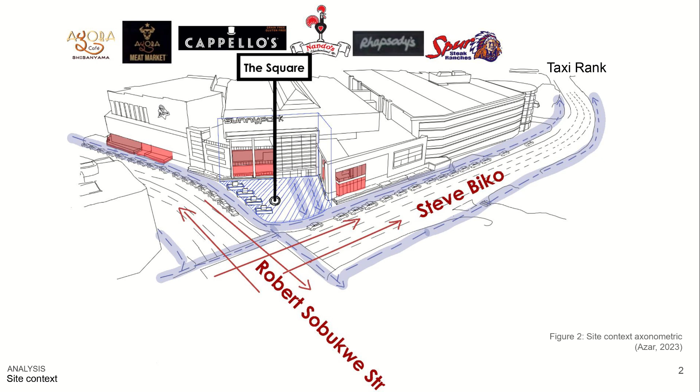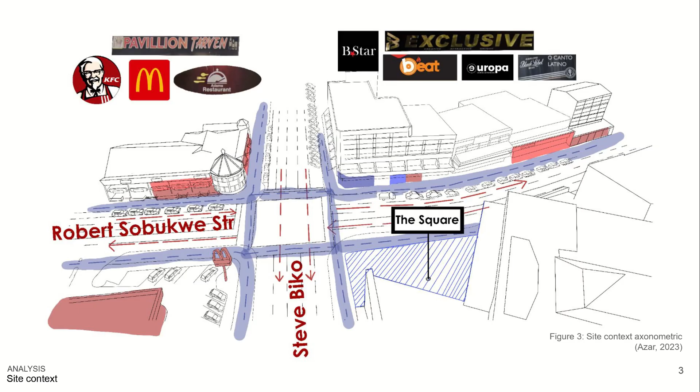Restaurants and bars associated with the mall overlook the square and the south surrounds of the mall. This includes the Spur, Nando's, and Ayoba Shisanyama. On the opposite side of Robert Sobukwe and Steve Biko are high-end fashion stores, chain food stores, and clubs, to list a few. The quality of infrastructure is ensured by the mall and therefore holds itself to a high regard.

The square of the mall currently provides a limited shaded seating area which can be classified as a weakness. There is an opportunity for the square space to facilitate events and to host a space for refuge.

The infrastructure of the mall is well maintained and kept clean. We observe that there is not sufficient lighting at night, which can be classified as an opportunity. The square of the mall facilitates a high number of foot traffic and people sitting.

Another weakness is the infrastructure of the mall that comes across as very rigid and is surrounded by a harsh environment. We feel this intersection has lots of potential, so here follows a few opportunities we identified.

The square can host food markets and culture events. The basement dedicated for services can be better utilized. We would like the intersection to attract a variety of economic groups, to facilitate more seating and to provide services for the traders to make use from, as well as to soften the hard landscape.

There is an opportunity to create a circular economy as well as the opportunity for advertising and sales. We would like the square to act as a linkage between the mall and Robert Sobukwe Street.

The following threats were identified at our intersection: too formal, which results in being alienated from the rest of the street, vehicular traffic along the mall, and the body corporate of the mall.

Through the SWOT analysis, we concluded that we would like to focus on the following aspects that were observed to be the stepping stones for our intervention: to have sufficient lighting during night, creating opportunities for future circular economy through providing basic services for the traders to make use of, and to increase the amount of trees and vegetation on site to soften the hard landscape.

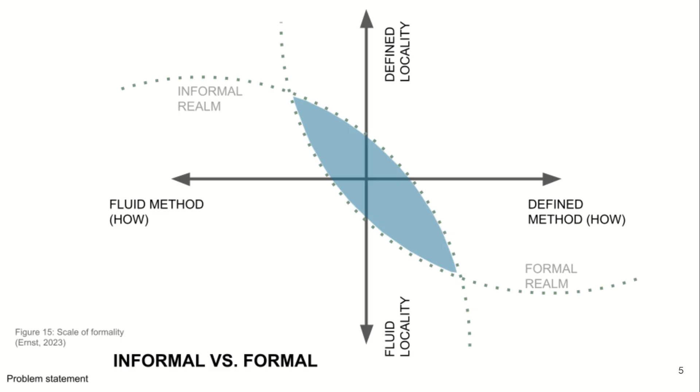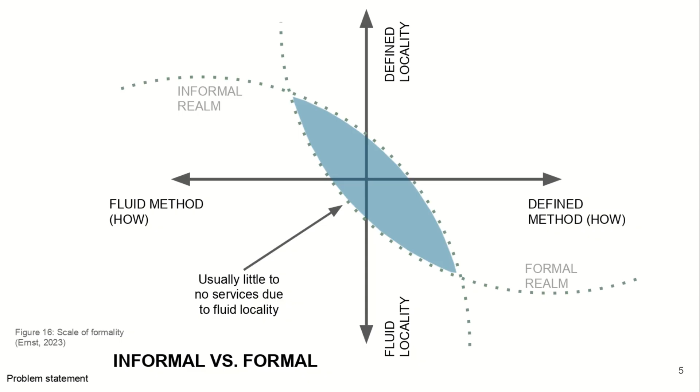Further, it is evident that a prevalent setback in the informal users of Robert Sobukwe Street is the lack of public access to services that could be made freely available by the mall. We do, however, feel that if given the chance, the two realms could be effectively intertwined at this point. In order for a significant value proposition to be made, the stark divide between the two realms needs to be addressed.

To make informed decisions on how we address this problem, we conducted a series of site observations. The observations took place over the length of approximately a month, and any assumptions made in the study are grounded in further desktop research on the relevant topics.

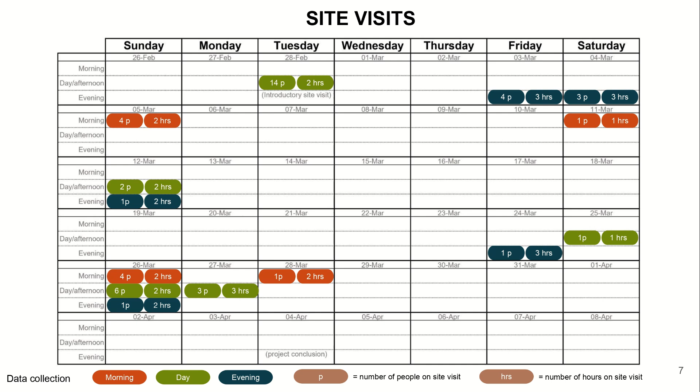At first, we assumed that the mall prevents all vendors from selling on the square, though mobile vendors do occasionally market themselves. This rule is enforced by the security along the mall's edge and on the square, who also ensure a safe environment for passersby. The parking lot is filled on the first few levels, but rarely fills to the top.

Building on the data we have collected, our intervention and value proposition is also informed by the successes and failures of two precedent studies. This concise analysis of precedent studies shows how previous projects, both international and local, strengthen the ability that malls and event spaces have on binding a community.

Our first precedent is the High Line, located in New York City. The High Line used to be an old railway located above a portion of New York and was repurposed to accommodate social interactions, active movements through the park, and community events.

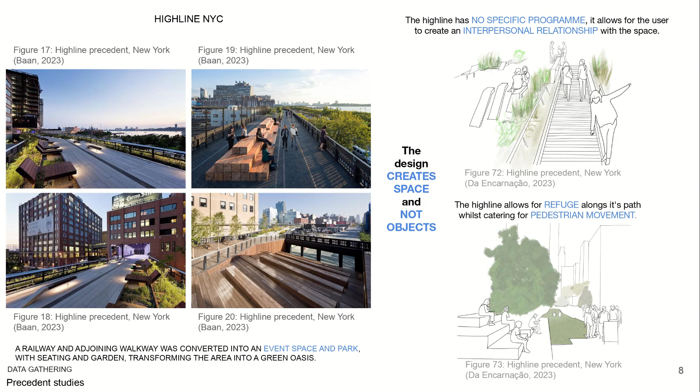The opportunities we identified that this precedent implemented are the following: the High Line has no specific program, allowing the users to create an interpersonal relationship with the space. This enables the design to create space and not objects.

The High Line allows for passive refuge along its path, whilst simultaneously providing active passageway for pedestrians. It shows the strength design has of reworking a space to include a more human-centered approach to a barren railway. The local precedent we studied is the Brooklyn Mall Vintage Thrift.

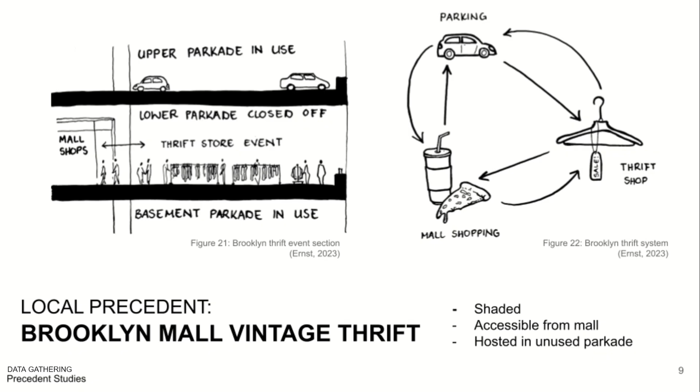This fashion thrift event did not require any alterations to the existing space, apart from an arrangement to close off one parkade once a month. Its success lies in the marketability of the event, allowing more people to attend. Mall shoppers can stumble upon the thrift market when exiting the mall, and thrift shoppers can use the mall for refreshments or groceries, allowing the two realms to mutually benefit from each other's clientele.

This economic and social success is achieved through the provision of pedestrian-friendly, shaded, event-based market space at little to no cost. We do, however, feel that the pedestrian access from the street could be improved and that greenery could be added to make the space more enjoyable.

Which brings us to the overarching theme of our value proposition: strengthening Sunnypark Mall as an intersection point between the formal and informal realms through the provision of accessible seating and services. Our value proposition suggests that the governing body of the mall will benefit greatly from financially facilitating the proposed intervention, and that the proposed intervention will open up many doors in the future to smoothen the introduction of a circular economy.

Based on the systems and activities that are currently active on our sites, as well as the SWOT analysis we've already covered, it is evident that we need an intervention that will merge the formal and informal realms by supporting and rethinking the following aspects.

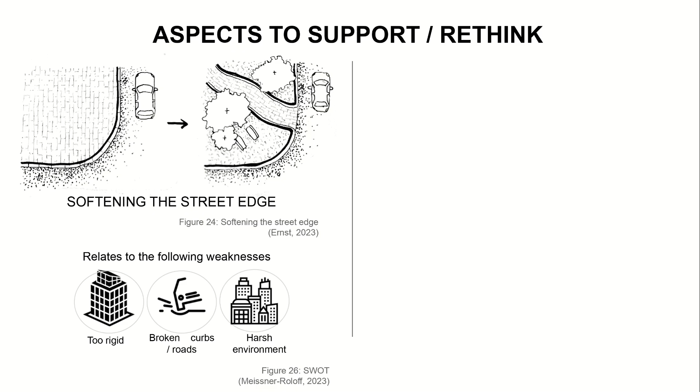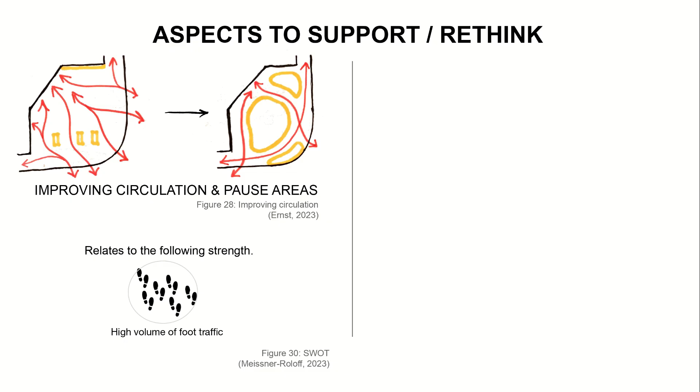The street edge needs to be softened in order to appear more appealing to the user. The addition and expansion of green areas will provide shade and an added sense of serenity to the space. The facilitation of movement and pause areas across the square and the adjacent streets needs to be improved. The hosting of events in the square area by the entrance of the mall can assist in drawing a wider range of people to the space.

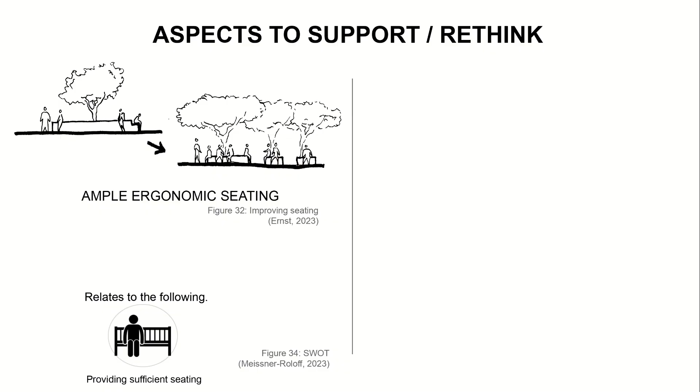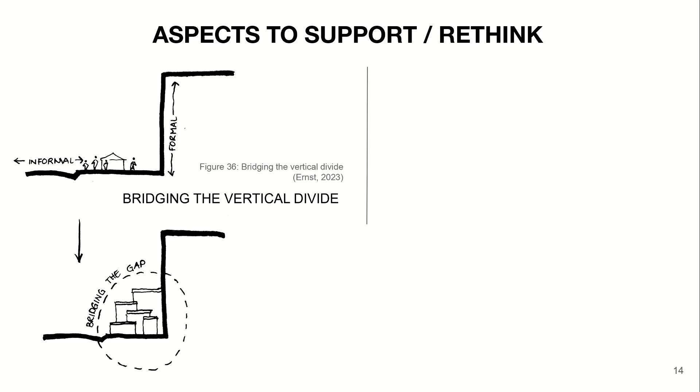The addition and redesign of seating to accommodate more people for longer times. The provision of services to the public users of the square. The proposed intervention should include multi-level roof structures that soften the contrast between the informal operating on ground level and the formal towering over them.

The mall and the vendors who use the square area can mutually benefit from each other's clientele. Vendors that use the square need to be able to advertise and sell their products in a safe and effective manner. The intervention must provide opportunities to introduce a circular economy into the system.

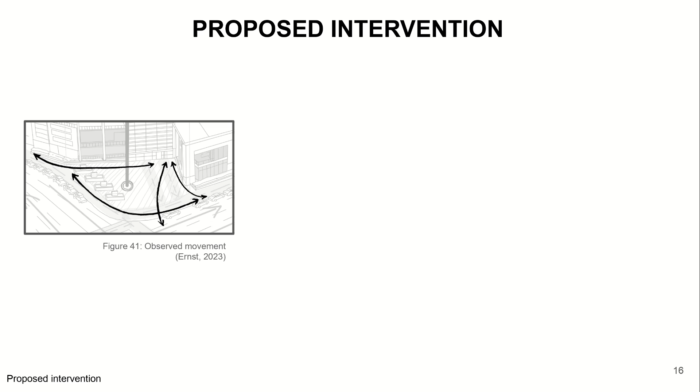The proposed intervention would be along the following lines. The main movement routes on the square are accentuated and tightened. The spaces in between these routes are softened with greenery to allow for pause areas.

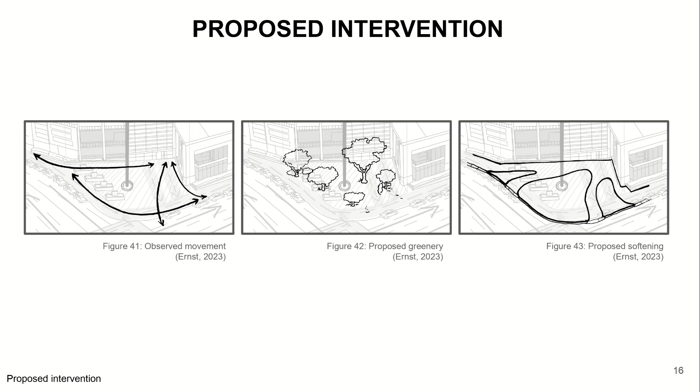The proposed pause areas are designed as multi-use modular structures that are installed by the mall. The mall can benefit from the use of these structures by utilizing them for event markets. The structural module acts as basic seating around a rainwater harvesting column.

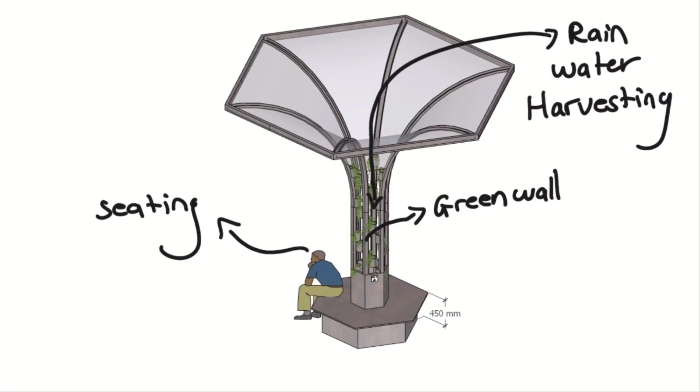The column structure incorporates greenery and shading elements to add to a softer street edge. The seat of the bench is adjustable to preset heights, and the structure is equipped with a service outlet that will be further unpacked later.

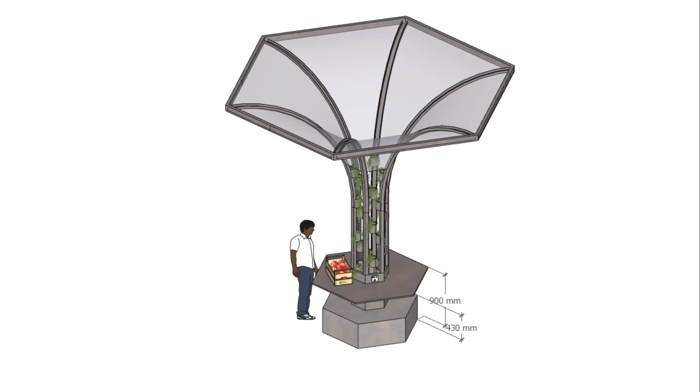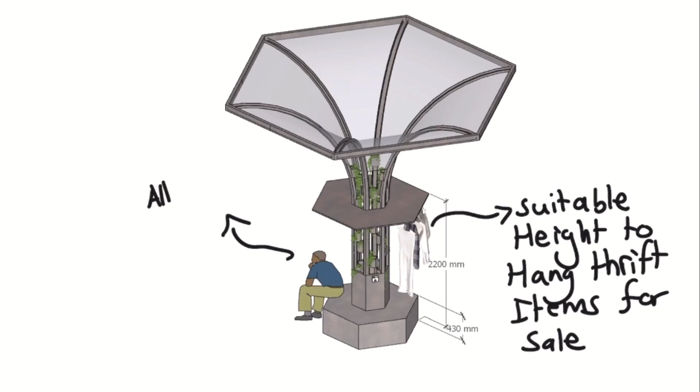The adjustable platform can alternate between acting as a seating device, a tabletop, or an overhead structure for hanging display, allowing for innovation in program of use. Between a select few structures, additional adjustable platforms are installed to ease the selling of products.

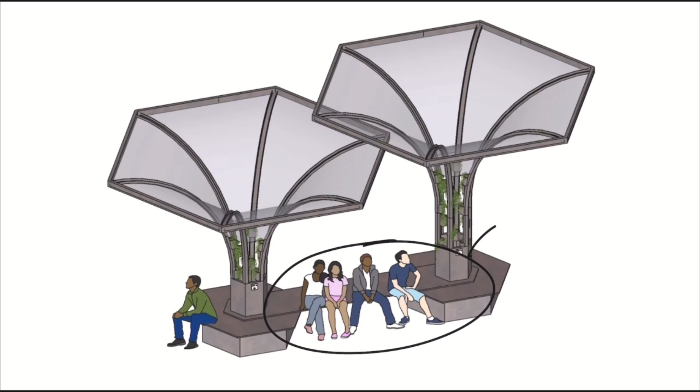This proposed dynamic between the mall and the vendors forms an extension of the already present relationship between the formal and informal vendors down Robert Sobukwe Street. There is a symbiotic nature to the interactions between the two, with the mall representing the formal, facilitating the space making of the vendors representing the informal.

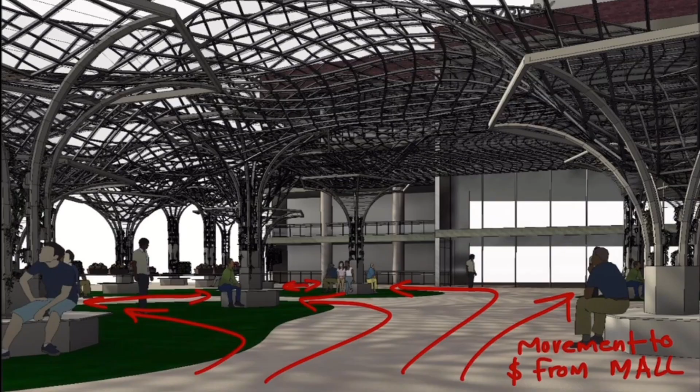These multi-use modular structures in the square are tied together visually with an overarching canopy. Further, individual structures as well as the principles for the softer street edges and the enhanced circulation routes are continued down the adjacent streets for the purpose of forming an identity and uniformity.

A proposed sustainable energy system that the mall can benefit from is a biogas system. This can generate cooking gas for restaurants and vendors. This gas can also generate electricity for the square and later on the mall.

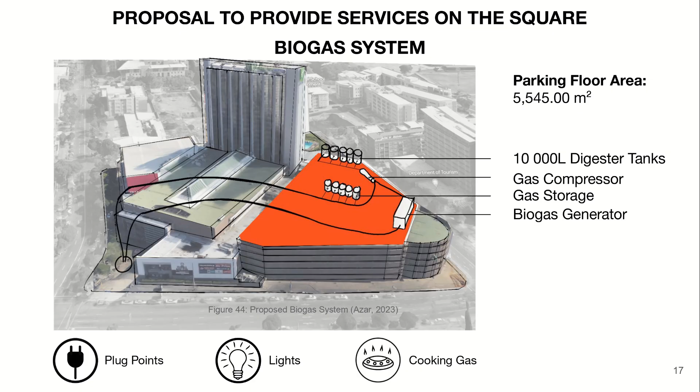But is this feasible? To help us better answer this question, we consulted with a chemical engineer. We started by looking at the mall's total electricity usage, which is 83 kilowatts per hour. This includes HVAC systems. 1 cube of biomass, roughly 700 kilograms, can produce 63 kilograms of methane.

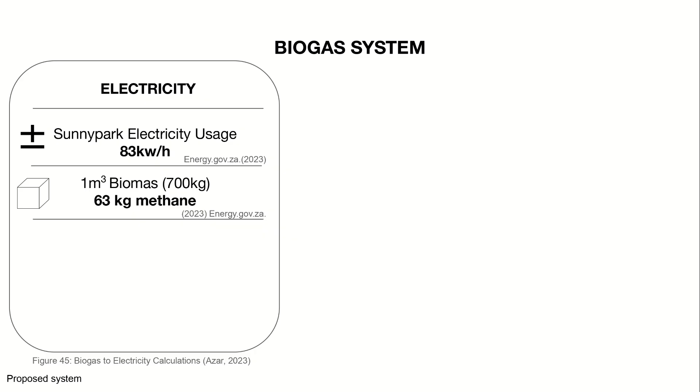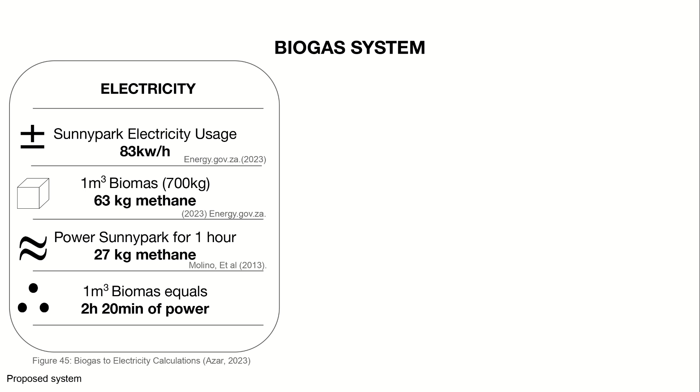To power the mall for an hour with a biogas generator requires 27 kilograms of methane. In summary, when the 1 cube of biomass processes into biogas, it can power the mall for 2 hours and 20 minutes. This could replace the mall's current cost to run generators, estimated at 170,000 rand.

This is an ambitious feat and could be a sustainable long-term goal for stakeholders. Yet, the initial setup of this biogas system will be able to run plug points and lights on the square.

In relation to the feasibility of cooking gas, we don't have to look far. Families in the South African Midlands collect organic waste for a month, which provides 3 hours of daily cooking gas for the next month. The mall has access to higher quantities of food waste through retail, which is estimated to be 160 kilograms daily.

In conclusion, this collection of organic waste will comfortably provide cooking gas and electricity for the square. As more organic waste is collected and processed, the system could grow to replace fuel generators for load shedding, as well as provide cooking gas for all its restaurants.

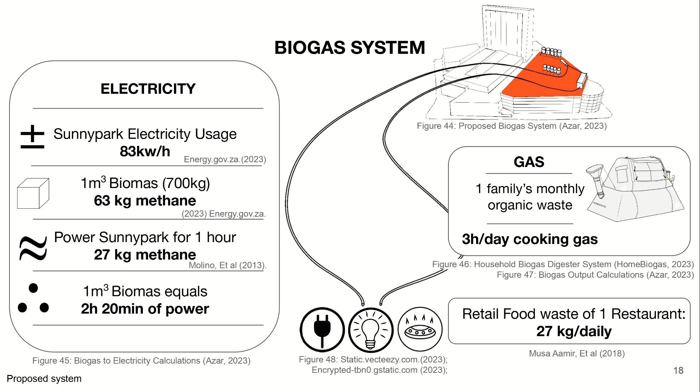The byproducts of the system also include plant nutrients rich in CO2, allowing for any green interventions on the street to grow rapidly.

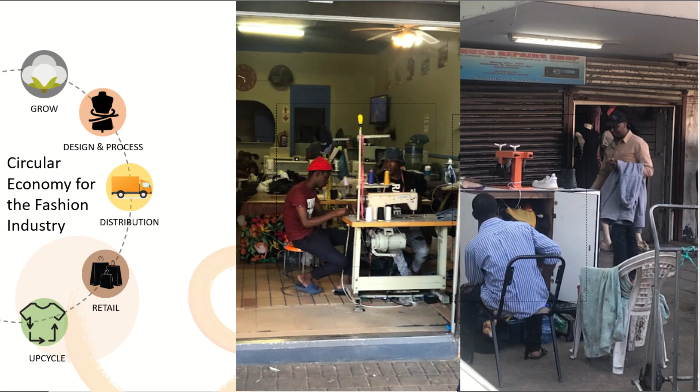After establishing a system to incorporate the production of biogas on our site for public benefit, we wanted to test how the users of our site could aid in the embracement of a circular economy. A prevalent opportunity in the mall lies within the unsustainable waste system currently applicable in the formal fashion and textile industry. We further identified an opportunity to merge realms by using the services of the informal retailers in the area. These opportunities gave way to the proposal of a circular economy intervention at our site.

Through research, we concluded that the world produces 92 million tons of textile waste every year. 10% of global greenhouse gas emissions are caused by clothing and footwear production. Just to put that statistic into perspective, that is more than all international flights and maritime shipping combined. Less than 1% of clothing is made into new garments.

We had a look at the proposed circular economy cycle for the fashion industry and identified an opportunity for us to intervene with our proposal to ensure that the amount of textile waste from Sunnypark Mall gets reduced.

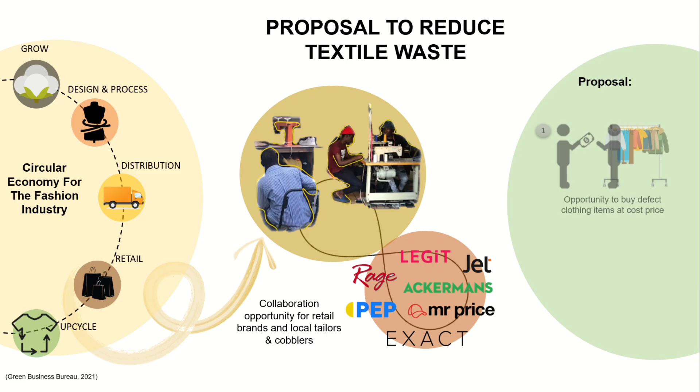We would like to initiate a proposal between the mall's clothing brands and the local tailors and cobblers, where they would have the opportunity to buy defect products from the brands at cost price. The tailors then have the opportunity to upcycle and customize the garments to increase the value of the items and decrease the amount of textile waste.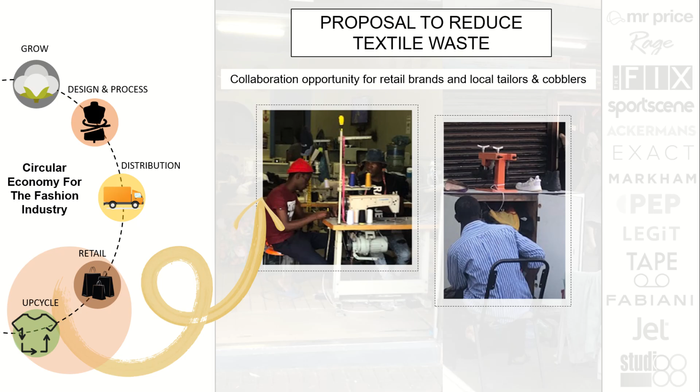This system of upcycling and resale ensures that waste gets repurposed at its highest value. The square facilitates the provision of services through its permanent biogas system and reinforces the upcycling of waste items through the hosting of supplementary thrift events in the square.

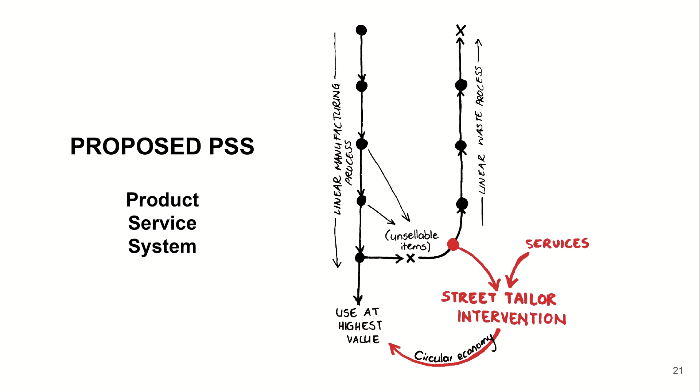The proposed product service system would be autopoietic, in that an increase in users will result in an increase in service availability. Our intervention transforms a currently unsuccessful, alienated space, Sunnypark Mall, into a space that fosters a product service system and a human-centered design approach. This enhances the quality, experience, and culture of space, transforming it into place.

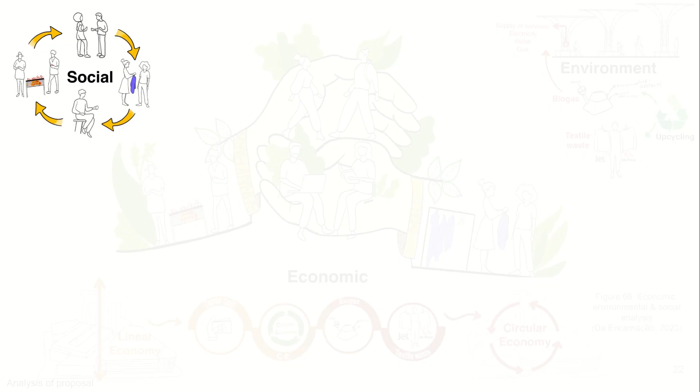The product service system embodies three main factors: social, environmental, and economic. The social factors allow for intimate relationships between people, customers, and employees, regardless of informality or formality. This is achieved through incorporating the culture of Robert Sobukwe Street into the square, allowing people to reside comfortably within the space while simultaneously maintaining the active passageway for pedestrians to move to and from the mall.

The environmental factors of our product service system are a mixture between an intuitive approach to circular economy and softening the hard and rigid edges of the square at Sunnypark Mall. The intuitive approach encompasses biogas and textile waste. Biogas is formulated from biowaste, which is transformed into electricity and gas encapsulated in the modular structures providing services to the square. The textile waste approach allows a relationship to be created between tailors on Robert Sobukwe Street and the formal fashion stores within the mall, creating a thrift event in the square.

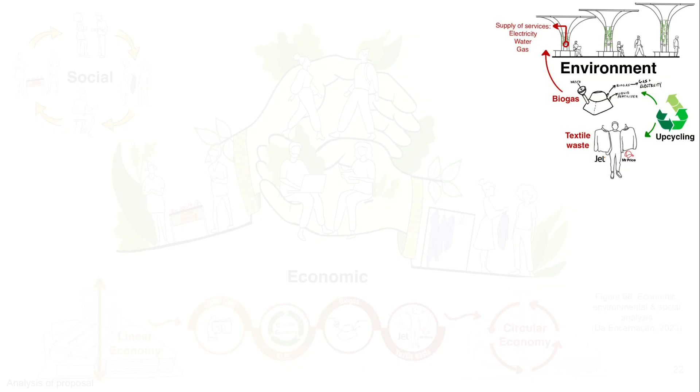This relationship decreases the carbon emissions released into the atmosphere and the textile waste sent back to the factories, which eventually ends up on waste piles. Green walls on the modular structures soften the hard spaces of the square. The economic factor is the benefit from replacing the current linear economy of the mall with our proposed circular economy intervention through our product service system.

So how does this value proposition benefit its different stakeholders and users? It is clear that every party can benefit from an increase in foot traffic at the square, an increase in pause areas, and participation in the proposed biogas and fashion upcycling systems.

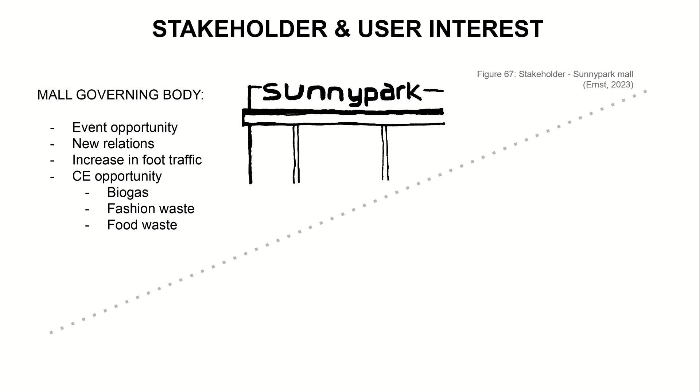Apart from these mutual benefits, there are also other benefits to the respective parties. The mall governing body can give their tenants the opportunity to occupy mobile stands during events. Local food and fashion traders are given a shaded place to sell their products and can set up next to the formal market stores that sell the same products for more, which will draw customers to the informal traders.

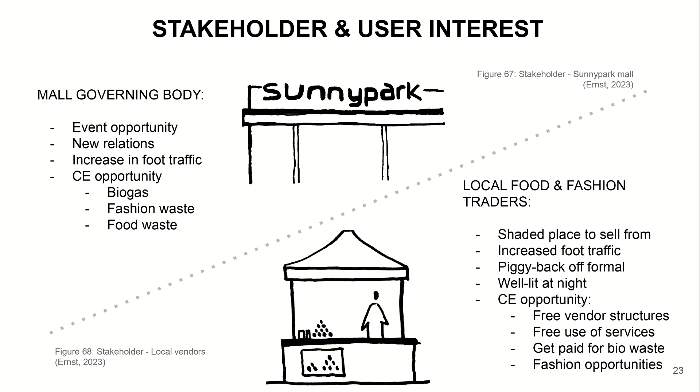The local franchises have the opportunity to occupy mobile stands during events and can give their customers a prime view of the events. The pedestrian users are given an inviting outdoor area to relax in and have the opportunity to find what they need right at the entrance, so they might not even have to enter the mall at all. The mall also becomes a beacon that's easy to navigate to and from.

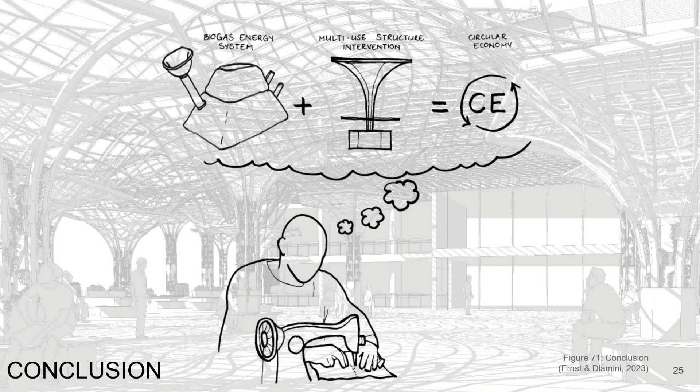The mall funds the intervention at the square and the addition of a sustainable energy solution. As mentioned previously, the biogas system will be of a sizable initial cost, but will render itself affordable after some time has passed. The mall and the participants in the formal and informal realms mutually benefit from each other's clientele, and the activation of the intersection point through public service provisions and additional seating reinforces this.

The newly established relationship between Sunnypark and formal-informal participants will not only facilitate stronger business networks and allow natural circular economies to flourish, but will also continuously supplement the input for the biogas system, wholly bridging the economic, social, and environmental gap between the extremes of the formal and informal.